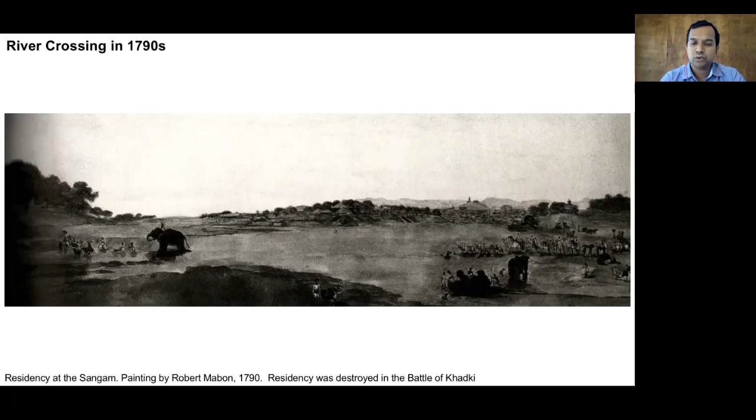During the 17th century, as there was no bridge constructed on the river, people used to cross the river or navigate by walking or with the help of animals. Because the city was very tiny and on one side only, the crossing was also not that frequent.

In the 18th century, this was a painting prepared by a British person. It shows Sinhagad in the background. This is the confluence area where the Mutha and Mula rivers come together, and on the left side you see Parvati and the settlement of Punavadi. You can easily identify that the settlement is very tiny, so the river water must have been very clean here and without any encroachment. The edges are very natural in condition.

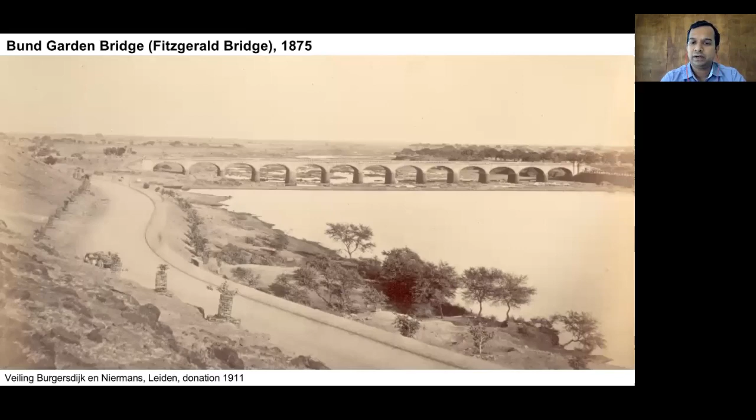After that, the first bridge was constructed at Bund Garden, and some other bridges also came into the picture. So once the bridge becomes a reality, crossing facility is provided and the city starts growing on the other side of the river also. That's how the city started growing on the other bank of the Mutha river.

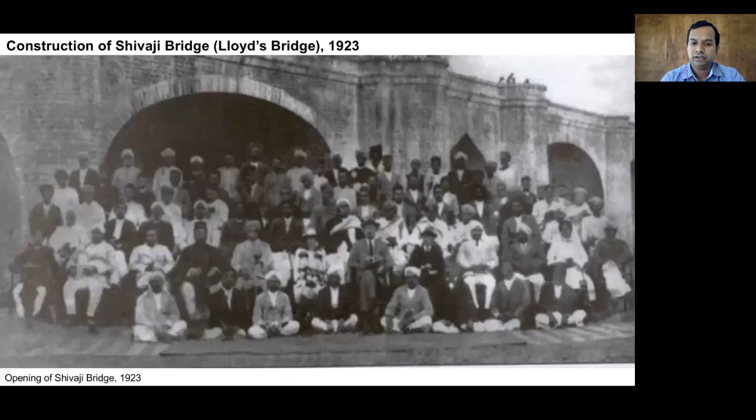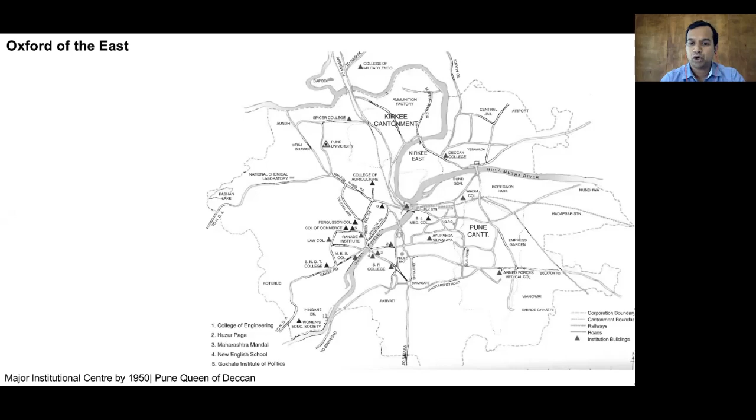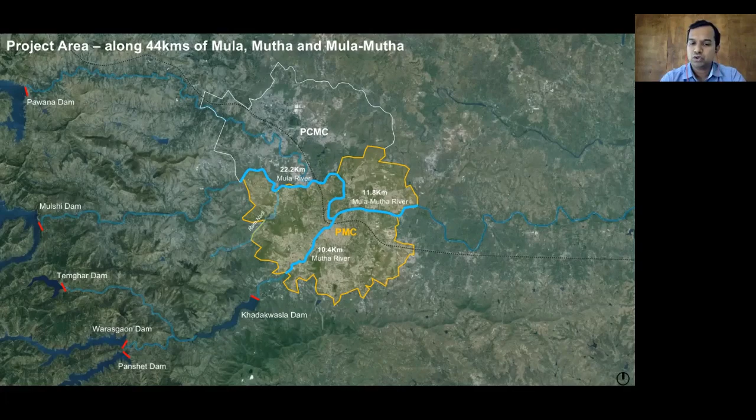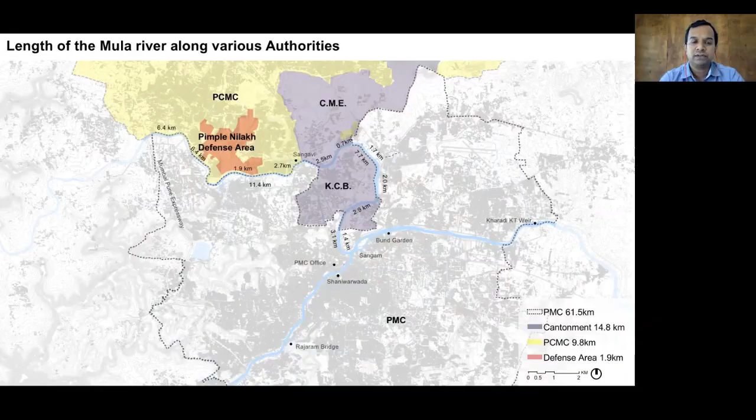We also have the PCMC boundary on the northern side of the Mula river, Pimple Nilakh defense area, CME and KCB defense areas along the river. So all these authorities were part of the project since the beginning, so that they are informed about what kind of proposals need to be framed for the river rejuvenation project.

So now let's understand which are the various technical studies we conducted for this project. There are a number of technical studies we did to understand the character of these rivers. The first one is the topographical survey, geotechnical investigation, hydrology and hydraulics understanding, and we also did a public opinion survey. We did a base map preparation and environmental monitoring also during the whole course of the project. So let's see one by one.

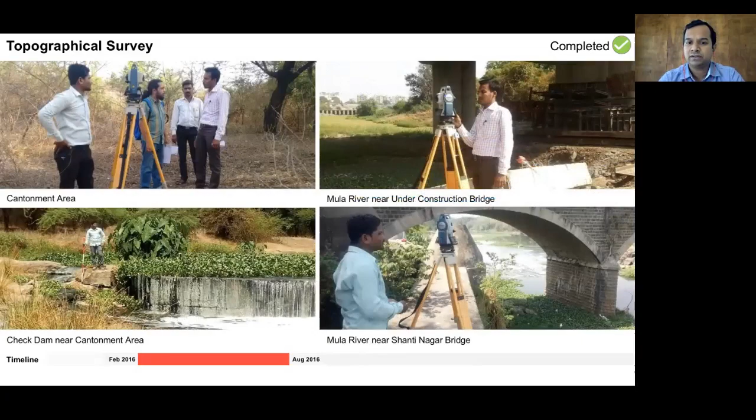And accordingly, we can prepare the further studies. So these are some of the visualizations of how the topographical survey of the entire river was conducted on site, below the bridge, within the river, everywhere.

Third important study was to understand the hydrology and hydraulics part of the river. The entire catchment of the rivers was studied for hydrology, and the hydraulics was also studied. We prepared a hydrology and hydraulics report for the river, on which we got vetting from CWPRS and clearance from the irrigation department subsequently.

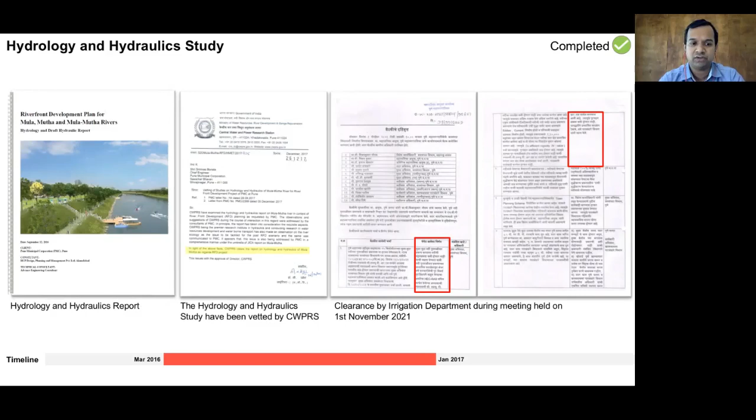In nutshell, whatever quantity of water flows through the river is studied under hydrology. How much water flows is the hydrological study, and how it will flow, what will be the character, what will be the levels, is defined under the hydraulic study. This is the combination of hydrology and hydraulic study, and based on the approved study, the project and the master plan is prepared.

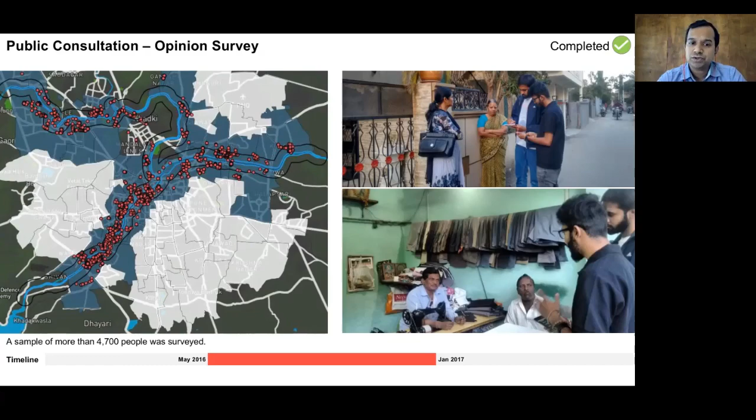A fourth important study was to understand the perception of people living along the river, those who are walking, jogging, doing some work. On both sides, within a 500-meter buffer, that is 1 kilometer total, we did an opinion survey of 4,700 plus people to understand existing issues and their perception and requirements from the project.

Improving the public open spaces - there are very few, and those need to be improved. The aesthetic importance of the river is not there currently; the river is very shabby and unhygienic, so that needs improvement. There are flood threats along the river area in low-lying areas, so flood safety is also important. Connectivity between the banks and along the bank was also identified by the people.

So if you summarize all these points, we need to prepare a comprehensive proposal which will resolve all these issues.

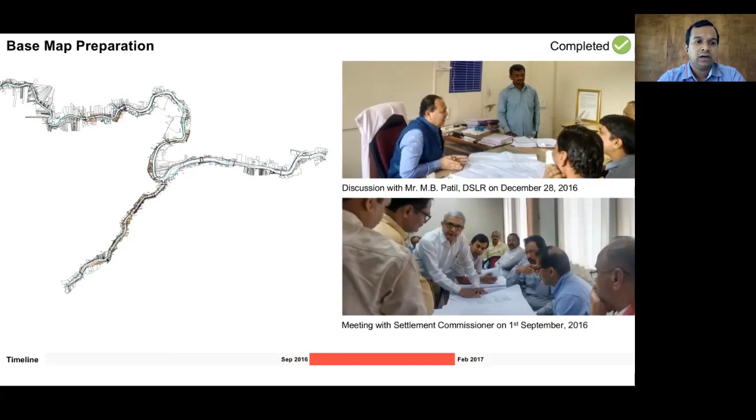Fifth, a very important study we conducted was to prepare a base map. Based on land record data from the land record department for both sides of the river, a detailed land record map was prepared to understand where exactly the river is on paper. Based on the topographical survey, when we adjust the land record data on it, on one side there will be a private plot, then the river, then a private plot on the other side. This black boundary becomes our river land boundary, the legal river land boundary as per the land record.

However, on site, the river might be within these boundaries, or at some places, because of scouring effect or anything, the river might shift a little bit. But in our case, because the riverbed is rocky, there aren't many places where scouring has happened and the river has shifted. So most places, the river is flowing through the river land itself - identifying the legal river land boundary was the objective.

Because whenever we go for execution and want to do some protection work or anything, then we need to understand who owns that land, right?

Sixth, one of the most important aspects of the study was to understand the environmental status of the river, such as the quality of water, soil, air, everything. We did baseline monitoring for all these aspects, and subsequently the project also got environmental clearance in November 2019.

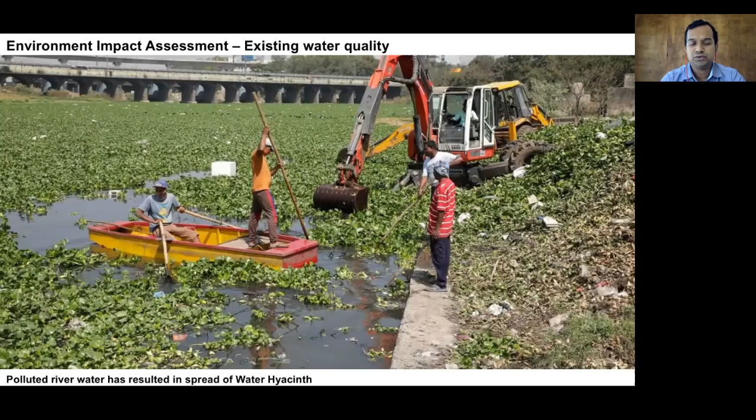So whatever water we see in the river is very much polluted, or it's sewage water flowing into the river. These are some of the locations where you see huge development of hyacinth and pollution. So all these were the technical studies which show that our river is very much polluted.

Our city has grown along the river, and we need to do a comprehensive project to deal with all the issues. But when we go on site, we also see some other visual aspects, like huge dumping of garbage along the river at many places. Similarly, debris dumping is happening along the river, and that's why pollution into the river, which we may call encroachment into the river, is also happening.

There are a number of piped outfalls or nalas, open outfalls, which are bringing polluted water into the river, which is further deteriorating the quality of water in the river.

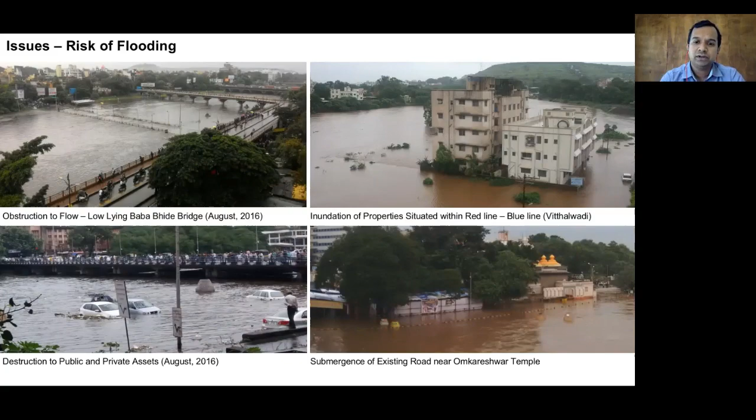Similarly, because the city has grown in numerous directions, we have 88 kilometers of edge here, so surrounding areas are often getting submerged during floods, and even the low-level roads or bridges get submerged very frequently. So flood threat is there.

Majority of the river edge is inaccessible. People cannot see the river, people cannot walk along the river, though it is a public asset. Majority of the river bank is dry, and whatever water we see in the river is just polluted drainage flowing into the river.

Even the Mula river, Mutha river, and Mula Mutha river, all three rivers have similar quality of water and similar dry riverbed. Because of this dryness, there is no growth of ecological trees, grasses, flora, fauna, and the unavailability of water is resulting in loss of aquatic life.

If we look at many places, the authority has developed some nice ghats. Drainage lines are there to control pollution in the river. Temples or gardens are also developed along the river. But all these activities or efforts are in a piecemeal manner.

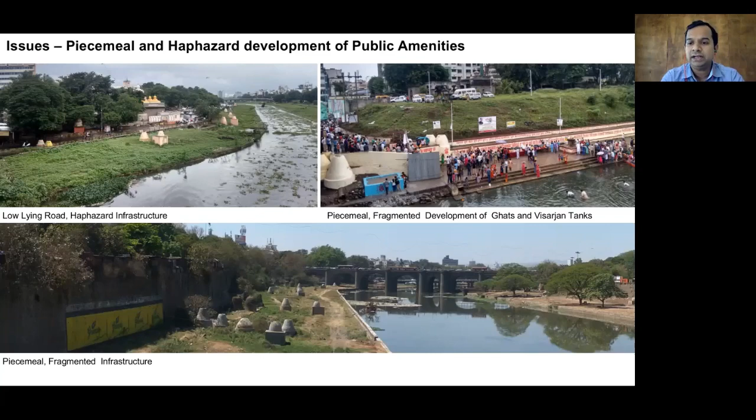So now under this project, we need to create a comprehensive proposal which will connect all these, and yet it should create a meaningful space for the city.

All these observations bring us to the conclusion that the city has turned its back to the river. Nobody wants to see the river. Nobody wants to approach the river. Even along the slum, you see a protection wall constructed so it isn't affected by the flood, and they don't want to see the river. Most people use the river for dumping, as you see here.

So our idea was to identify the issues that are there in the river, and all those issues need to be addressed and converted into a positive opportunity for the river development, river rejuvenation project.

So if the river is polluted, then we need to make it clean and pollution free. The river has a risk of flooding, so that risk needs to be reduced. The river cannot be accessed by people, so we need to make the river accessible in a strategic way. The riverbed is mostly dry, resulting in loss of ecology and biodiversity, so we need to bring in clean flowing water.

Poor connectivity along and across the river is creating issues, so we need to improve the connectivity aspect of the river. Whatever piecemeal, haphazard development has happened, along with existing heritage, recreational, religious, and socio-cultural activities, those need to be integrated into this proposal, and better connectivity with the river should be established.

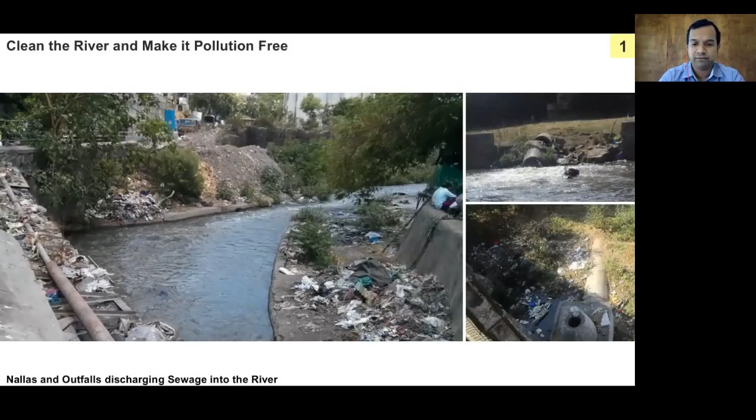Now let's see one by one how these objectives are strategized into the master plan. There are multiple locations where pollution is entering the river in the form of nalas and piped outfalls. These are the locations where the nalas and piped outfalls are bringing pollution into the river.

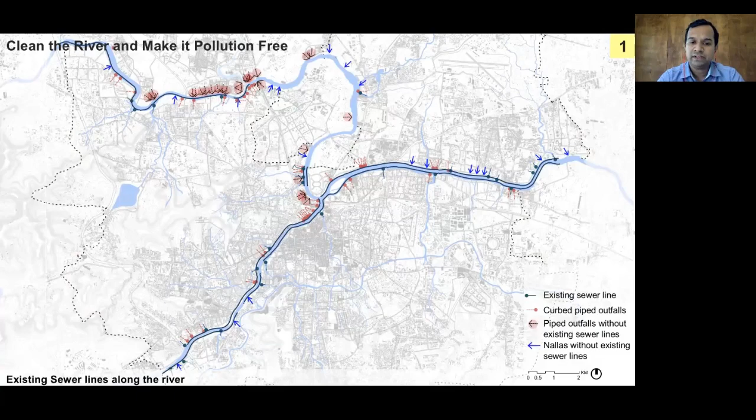So we try to understand where the existing interceptor lines along the river are. Either they can help to curb these piped outfalls and nalas and take the effluent into these interceptor lines. Apart from that, the JICA proposal is also ongoing. Under the JICA proposal, there are some locations where, along the river, the interceptor line is proposed. So wherever possible, these piped outfalls or polluted nalas can be curbed with the help of these lines and taken to the STP for treatment.

However, even if some nalas and piped outfalls remain and enter into the river, polluting it, then we can add another interceptor line which can help us curb these polluting sources and take the effluent till the treatment plant.

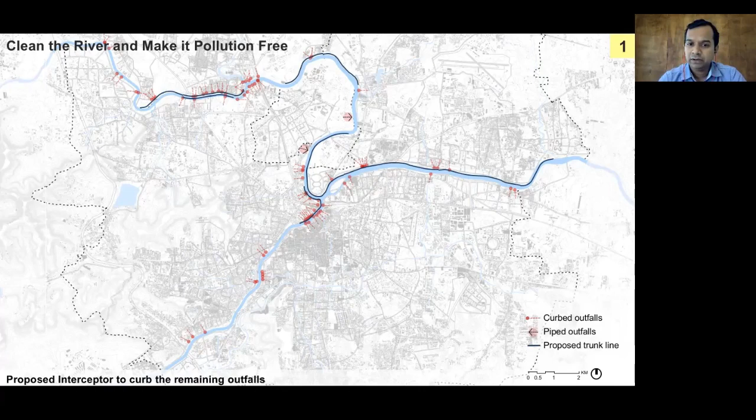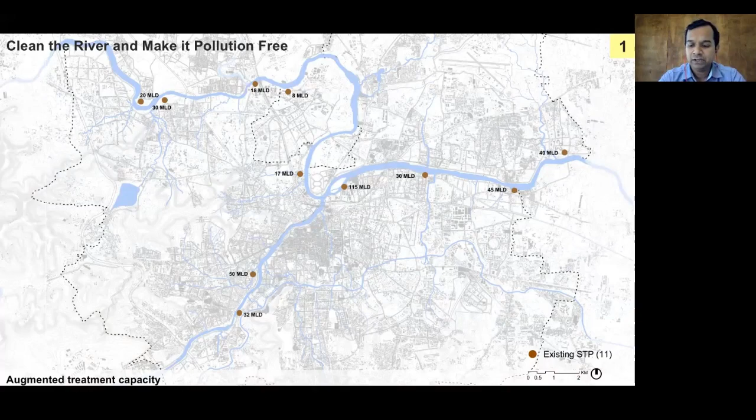So let's understand the scenario of the STPs. Currently we have 11 STPs, and most of these are along the river. Apart from these 11, under the JICA project, 10 more STPs are proposed and will be added very soon. The work is ongoing, tenders have been floated, and very soon we will see these STPs working, taking care of the entire treatment of the city's effluent.

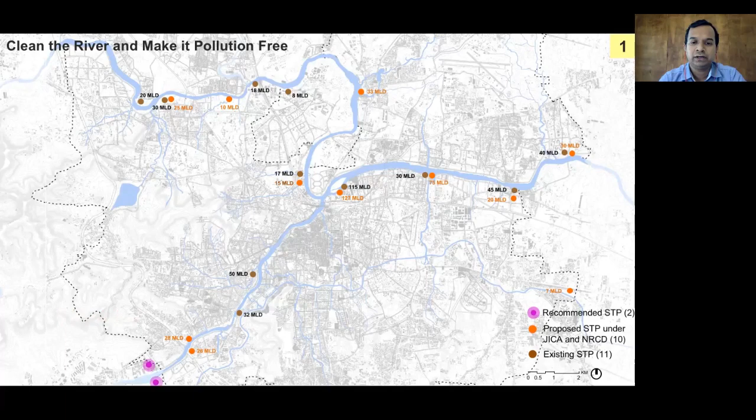Apart from that, on the upstream part of the river Mutha, we can see development happening, so effluent from there should not directly flow into the river either. Hence, we have proposed 2 STPs on the upstream part, on both sides of the river, so that only treated water enters the river. Once these STPs are established and executed, PMC will be able to treat 100% of the effluent generated in the city, and no outfalls will bring effluent into the river.

In the existing situation, we have 477 MLD of working STP capacity. Under JICA, these 10 STPs will add 396 MLD, which together becomes 873 MLD. Apart from that, private STPs already existing add 32 MLD. There are 4 additional STPs in progress totaling 132 MLD, and the remaining 25 MLD STP will also be added, covering 100% of Pune city's requirement.

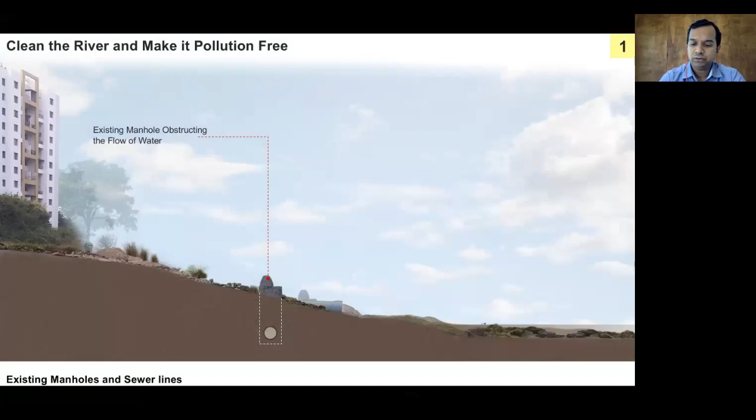But in the existing condition, we also see these kinds of interceptor lines along the river with huge manholes. During floods, these manholes act as an obstruction to the flow of water and also get damaged, resulting in leakage of sewage into the river. To avoid that, we are proposing to integrate these existing lines. If required, we can shift these lines behind and better integrate them with the proposed green embankment, so there will be no damage, no obstruction to flow during floods, and maintenance will also be very easy.

And that's how we can get rid of the garbage dumping and construction debris along the river, and make, in a real sense, the river clean from all types of pollution.

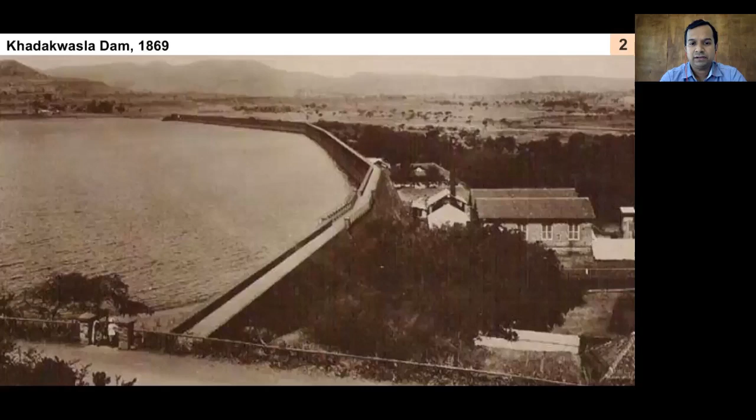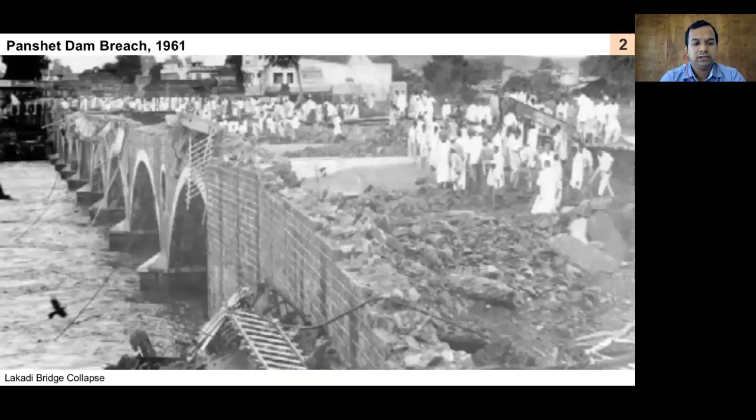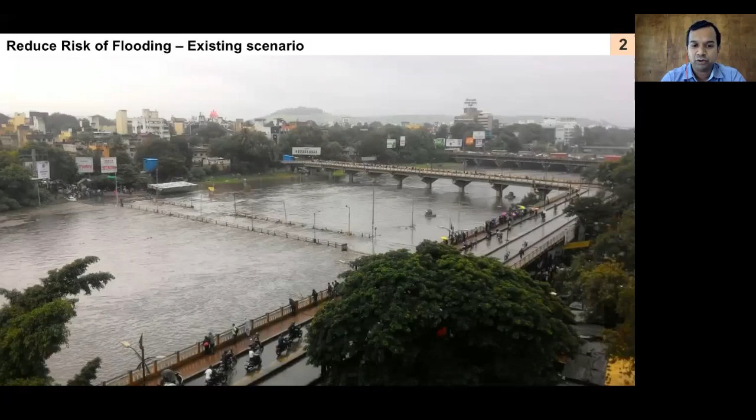However, we still face some amount of flooding along the river, which is a kind of frequent flooding, up to the 100-year level. In this photograph, the Baba Bhide bridge, which is a low-level bridge, and the roads along it on both sides are submerged under water. Because of these kind of structures, the flood water level also increases, as they create obstruction to the water flow.

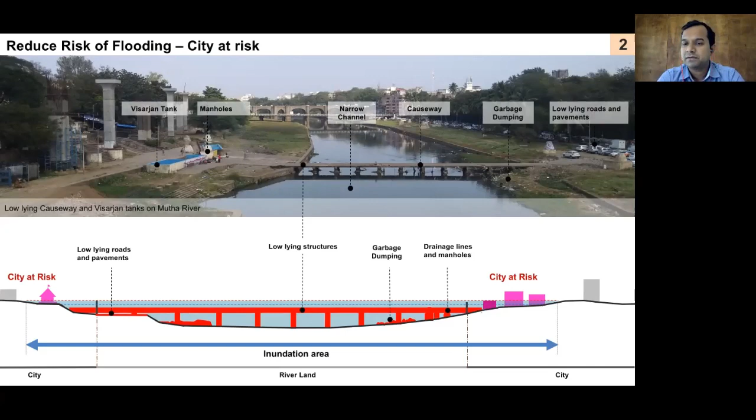So if we remove all these obstructions, the path of the river water will be easier, the water level will reduce, and it will also reduce the inundation area. However, there might still be some inundation into the surrounding area.

In order to protect these surrounding areas, we need to create edge protections. But understanding the local climate and conditions, we are proposing a green kind of edge protection work. During non-flood time, it will house thick vegetation, native grasses and shrubs, and walking trails. And when the flood comes, it will allow the flood to pass, but not inundate the surrounding areas.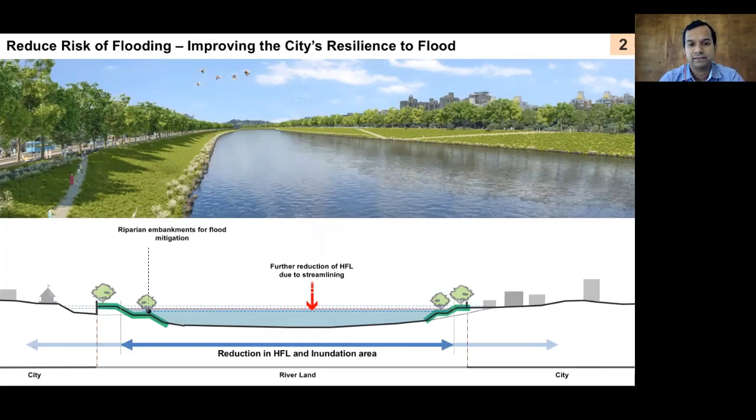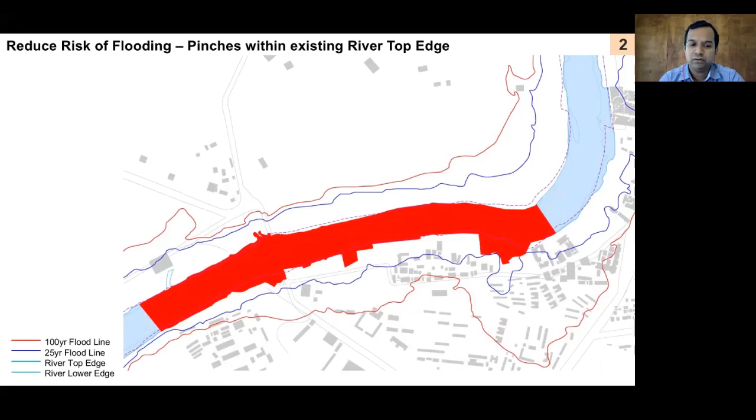When water flows through the river in a lean period, it flows in a meandering manner because the river edges are undulating, both front and back. When the water level rises up to the river bank top, the undulation increases because of these meandering edges, which you can see here.

When the flood comes up to the frequent flood level, which is a 25-year flood, these surrounding low-level areas also get inundated. Because these are very low-level areas, the water becomes a little stagnant there, the velocity reduces, and it also creates eddies, meaning the water flows in a circular manner. This also creates obstruction to the flowing water, and subsequently the water velocity reduces further.

Further to that, when a higher flood comes, let's assume a 100-year flood as indicated in the red line, those low-level areas in the surrounding may also get inundated. Some of these areas might be developed on site. Again, these kind of dead pockets are created where water enters but remains stagnant, not actually adding to the flow area of the river.

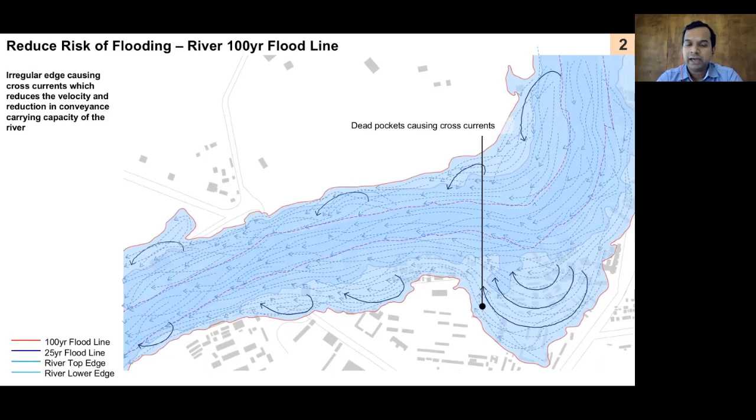So what we are trying to do in this scenario is, the actual flowing water is in the middle where the maximum height and width are available. So from there, if we concentrate all the water to flow, we need to create this kind of streamlining. Our entire water should flow from the center because the surrounding water is not really adding value, rather creating eddies and reducing the velocity and increasing the HFL.

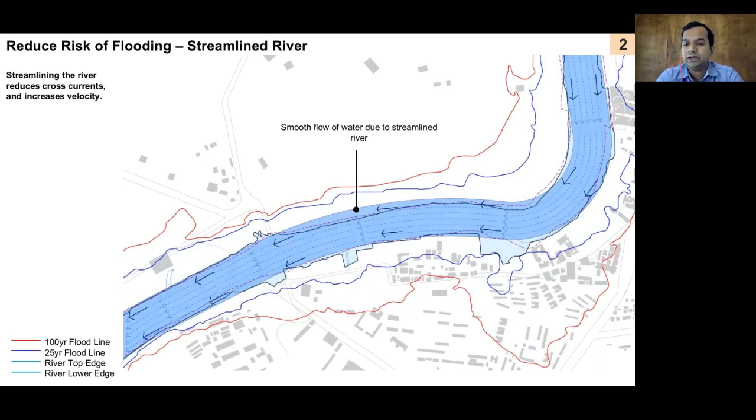So in order to ensure that the water flows through the river itself and does not inundate the surrounding areas, it is important to create some edge along the river. And that edge protection work, which we can call a 100-year embankment, is proposed along the river, along the same alignment as the existing river. So this is how the existing cross section looks like.

The dead areas were there, and by doing the edge protection, we get rid of the dead areas and the river velocity increases. Now let's see a particular location.

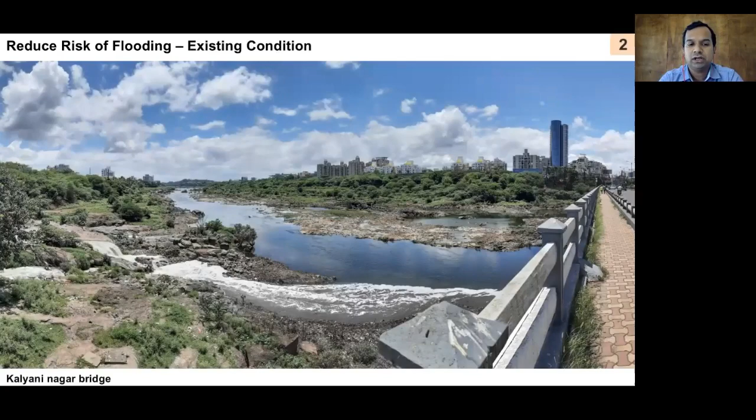This is a photograph from the Kalyani Nagar bridge showing how the lean period effluent water flows into the river. If the surrounding inundation area gets inundated, like if the 100-year flood comes, here's how it happens. But if we have the edge protection work, the same water will pass through the river prism only. It will not inundate the surrounding area.

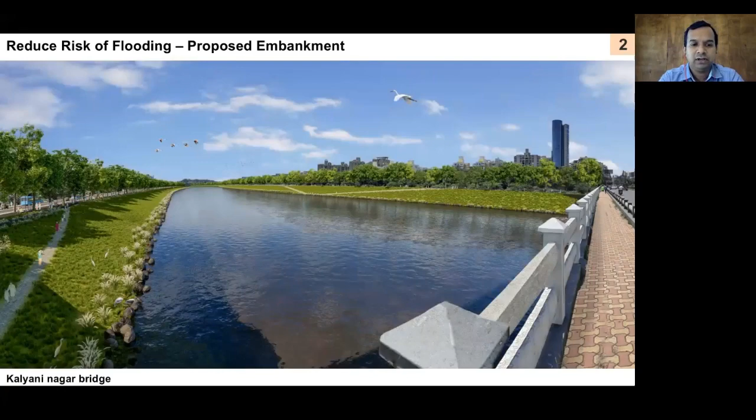And once the water is gone, the next day we can again have these green edges available for people to walk and jog. Similarly, if we have a developed area, in that case if the 100-year flood comes, the damage will be very high. There will be damage to property as well as life.

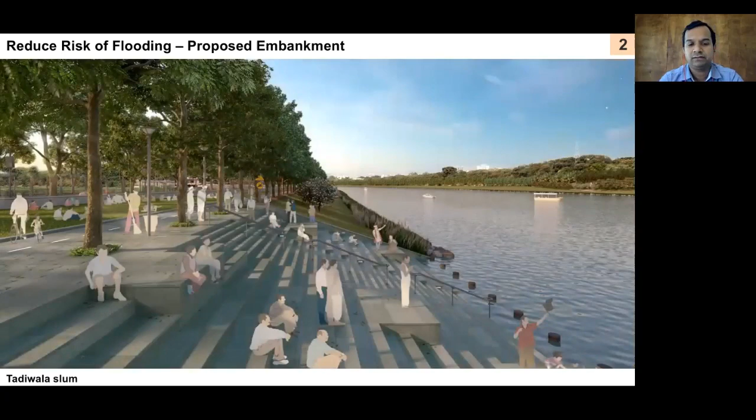In order to protect these areas, we need to have this kind of edge protection work, which will not allow the water to enter these areas, but water should flow through the river only. And once the flood is gone, it is available for people to access easily.

But because our rivers are very long, 44 kilometers, we don't want to have one type of embankment. So we try to understand the various types of development along the river. We observe that there are some areas where sparse development is there, or rather no development at all. Some areas have moderate development along the river, and some areas, especially Mutha Nadi, where development has choked the river.

That means we have areas where significant land is available, areas where moderate land is available, and areas where no land is available. The development or city has reached up to the river itself, and you see the narrow existing channel also there inside the Mutha river.

So our objective was, wherever land is available, we can create these kinds of green edge protection works with walking trails, cycling trails, using natural stones and compacted earth, native trees and grasses.

If the land is a little limited, then we can go a little trapezoidal, however the technology can remain the same natural material. But if there is no area available, then it is forceful to go vertical. However, this vertical edge protection will also have trees so that people can walk through the shade, and the interceptor line will also be accommodated inside to ensure clean water.

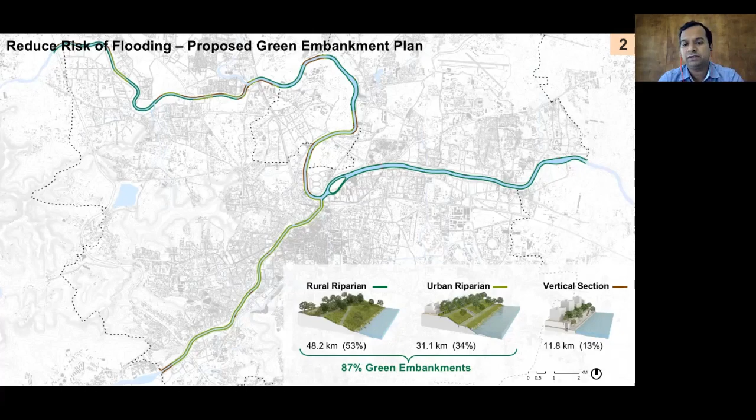So in summary, the majority of the river edge protection work will happen in a natural form, with natural material, covered with native grasses, trees and shrubs. And that's how we will be able to protect the low-lying surrounding areas, as well as protect the river from encroachment and erosion.

Now let's go to the next objective, which is making the river accessible for people, because the river is a public asset, but we cannot approach the river, we cannot see the river, we cannot really enjoy the river everywhere. At very few locations can we see the river. But we don't want to make the entire river, 88 kilometers of edge on both sides, accessible.

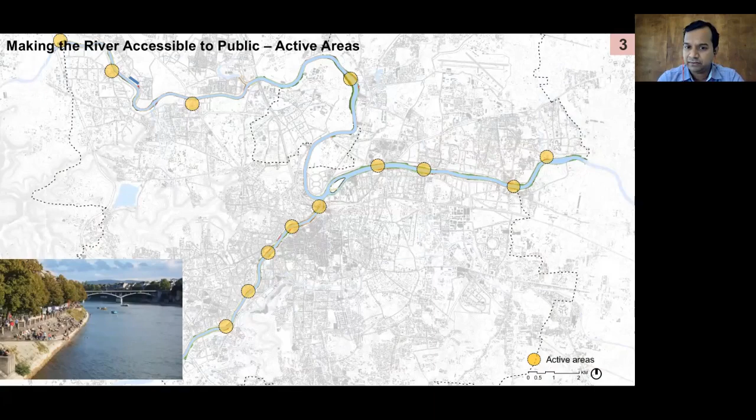So we prepare a strategy which says wherever we have existing activities, there we can propose the active areas where there will be more footfall. Majority of the river may have calm walking areas or walking trails only, where people can do walking, cycling, sitting, and more greener sort of edge protection work.

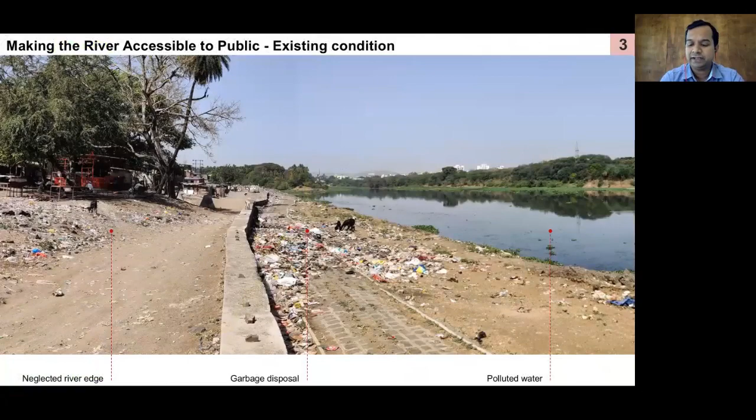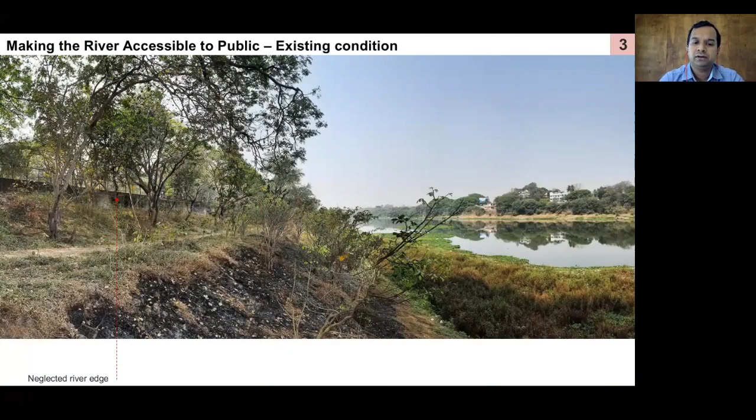However, at some places where we have a place like Salim Ali Bird Sanctuary, or the Ram Nadi confluence, there we can definitely go further with a more greener and natural way, ensuring a minimalistic approach and minimalistic access at these areas, so that we should not hamper the existing ecology.

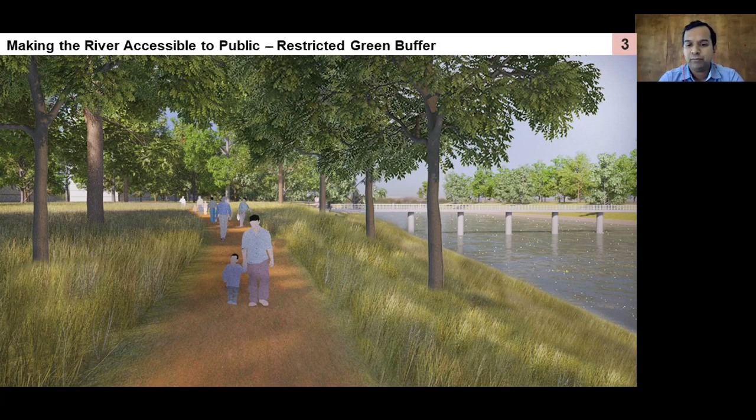So all these three types of embankments will have upper level, lower level walkways, staircases, and plantation.

Apart from that, we also have the culture of Ganesh Visarjan, and for that, at numerous places, we have small or large ghats developed. Some of these ghats are in very good condition, while some need repair. So we mapped all these ghats which are there on site, and at strategic locations, we also added some more ghats.

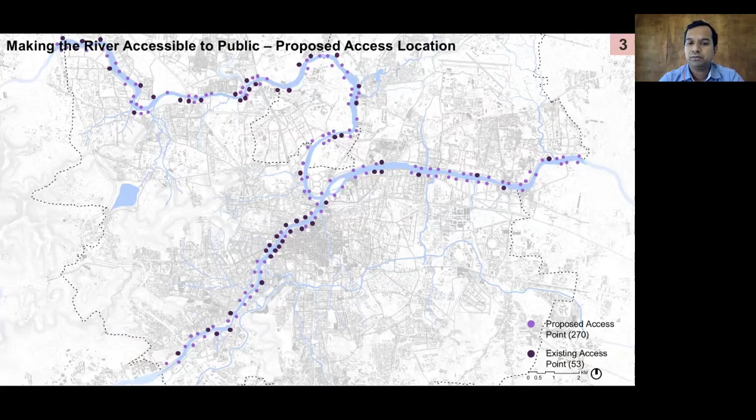At many places, we have these access steps. More access steps will be added along the river, so that at many places people can reach up to the river or see the river. These might be in the form of steps or a ramp.

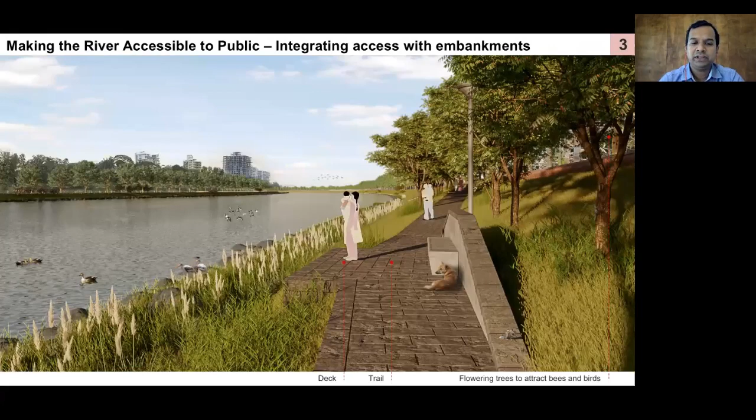This is one of the visualizations which shows that at the upper level we have a wide walkway, and there might be some trails taking people down to the water. If you see this existing condition and how it might be transformed, one can enjoy the ecology and the clean water along the river. That's how strategically we can improve the accessibility along the river.

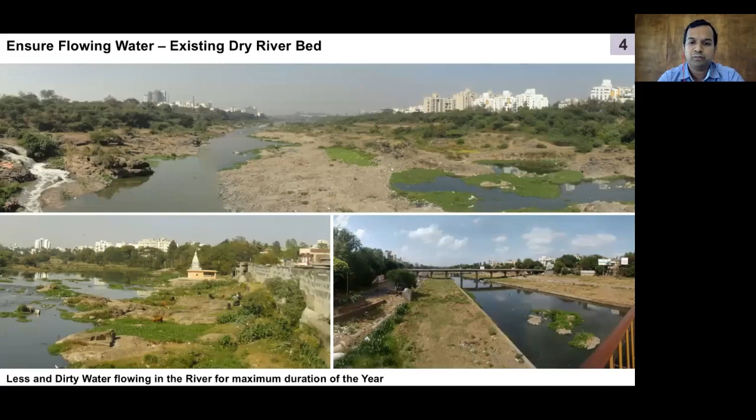Now, let's understand how to ensure water in the river, but that water has to be clean as well as flowing. In the existing condition, the majority of the river bed is dry, and whatever water we see is polluted water only. Why is this happening?

Because if we see the existing reservoirs, they are very small reservoirs, and because of that, the water retention is only up to a certain level and length. Apart from that, these reservoirs are either solid in nature or have a very large number of small gates, which is actually resulting in a solid barrier for the flow of water. That is resulting in siltation on the upstream part, as well as afflux during the flood.

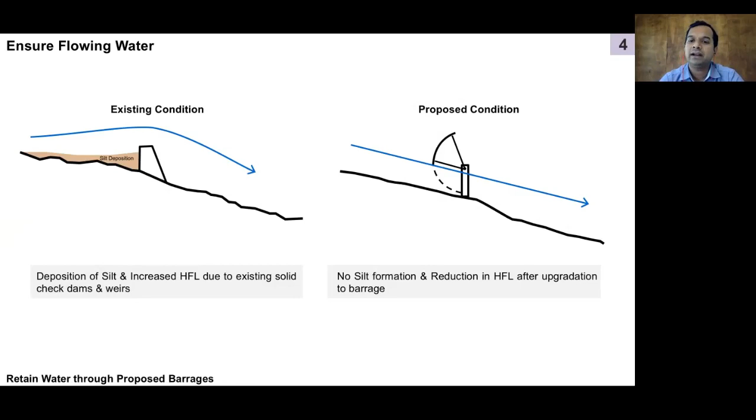So we are proposing to remove these solid retention structures and replace them with advanced barrages, which will open from the bottom during flood time, so that there will be no siltation at the bottom, and the HFL also will not increase. After the flood time, we can again close the gates and retain the water into the river for the entire length of the river.

So this is the existing scenario, where you see that at a few places we have water, and the majority of the river is without retention. However, considering the existing water retention structure locations, the advanced barrages are proposed so that the entire river will have water availability.

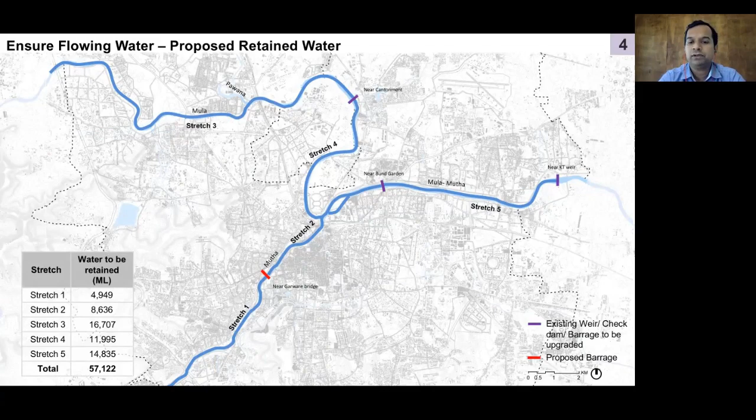After having the water availability, around 57,000 million liters of water will be stored into the river. As our river has a rocky bed, a limited amount of seepage will happen, and we also calculated the evaporation rate. In totality, around 56 MLD of water loss will occur per day, considering evaporation and seepage, reducing the retained water by that amount daily.

However, around 873 MLD of water will be treated in existing and proposed STPs, which will be poured into the river to ensure flowing water. That's how clean and flowing water will be made available. We need only 6% of water to balance the retention, and the additional 94% will ensure the water keeps flowing, so it will never be stagnant.

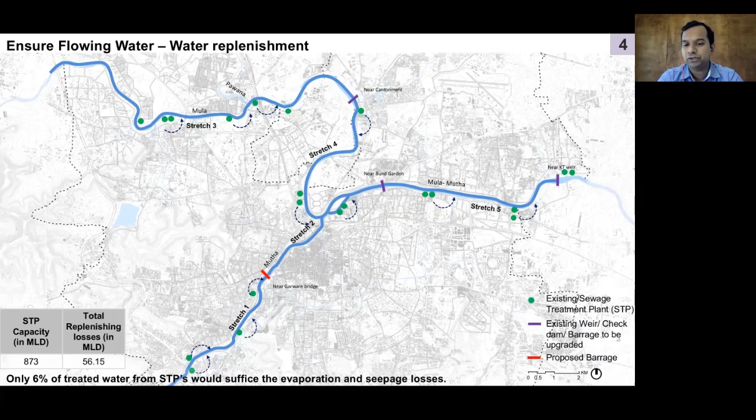To ensure water quality as per MPCB standards, if required, tertiary treatment facilities will also be installed so the water in the river meets the standards. That's the commitment by PMC, so that water poured from the STPs will be of that quality.

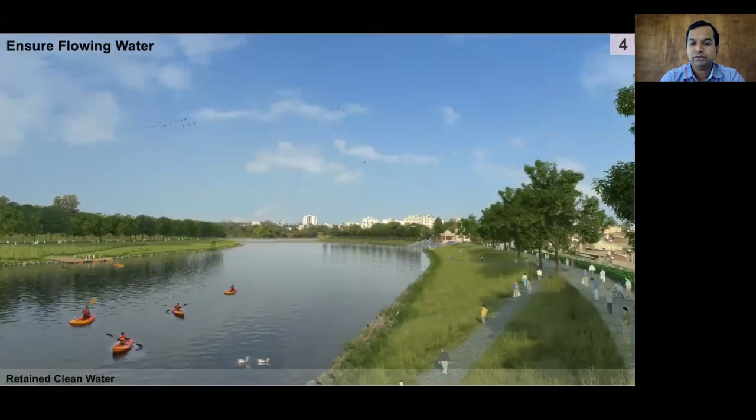So let's see how the current river is. After clean water is retained at strategic locations, recreational boating can also happen. Because the river is narrow, meandering, and has a rocky bed, we are not proposing complete navigation through the river, but on the upstream part of each reservoir, recreational boating will definitely be possible.

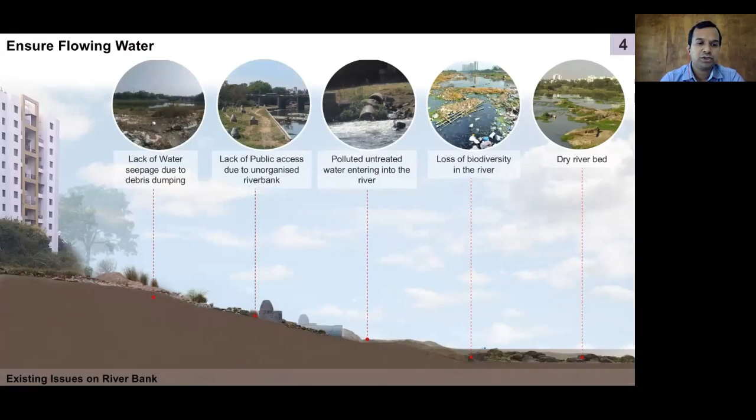Let's understand this in a cross section. This is the existing condition of the river, where the riverbed is mostly dry, causing a loss of biodiversity. Whatever water is flowing is mostly polluted. The drainage lines are very unorganized and haphazard, with dumping of garbage and debris causing lack of seepage, and pollution entering the ground, leading to random invasive species developing along the river.

What we propose is, with clean water in the river and the help of boulders and deep-rooted grasses, aquatic and surface life will flourish. We propose indigenous grass species to protect the edge and prevent loss of surface soil. Hardy indigenous trees are proposed for nesting and roosting, and fruit trees for birds, bringing back the lost ecology.

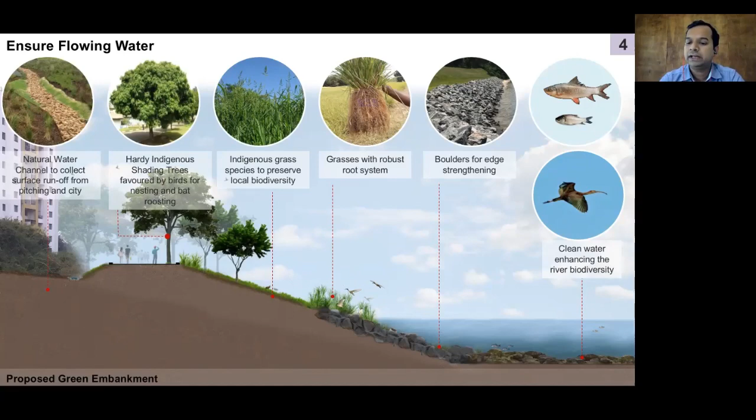People will be able to walk along the river under the shade of trees, with green edges. Earthen embankments are proposed, with retained water in front. Natural materials are used, and landscaped edges are proposed.

By ensuring clean flowing water into the river, it will help recharge the ground through the seepage effect. The current riverbed is dry with exposed rocks, causing temperature to increase during summer, and edges are barren without trees in many places. With water in the river and thick vegetated edges, the local temperature will definitely reduce.

We are also proposing to restore the existing flora and fauna, as mentioned in the accessibility strategy. With water in the river, the ecology and biodiversity will improve. At strategic locations, recreational boating will also be possible, and in totality, the river will get rejuvenated, coming back to its self-cleaning capacity.

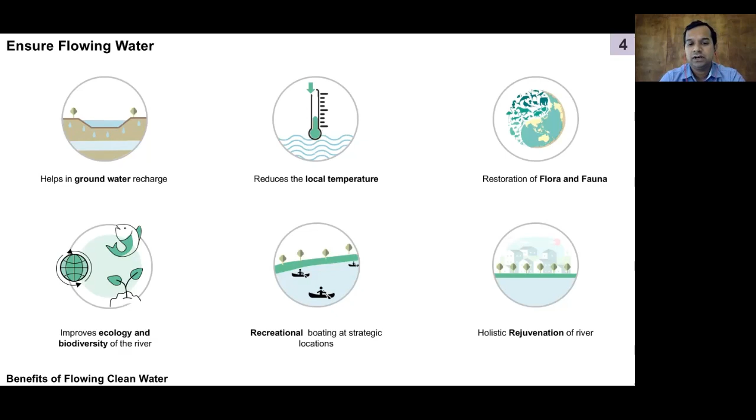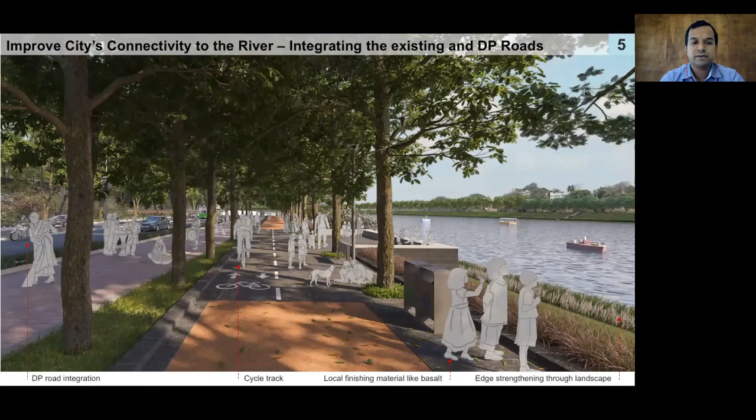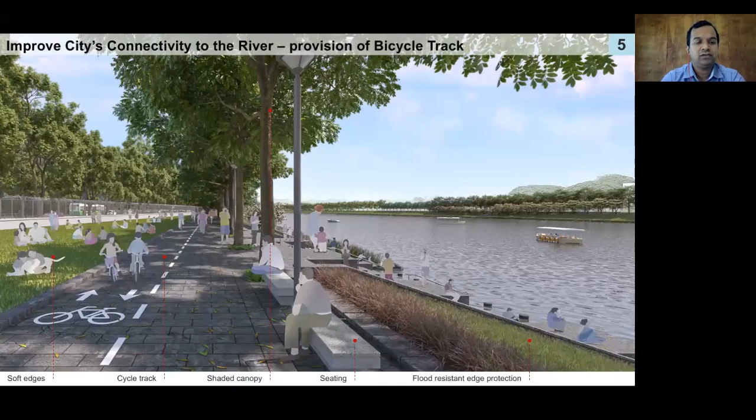Apart from that, the upper level promenade will not only have pedestrian movement, but also help to have smooth cycling trails along the river. And that's how the city will improve its connectivity with the riverfront project.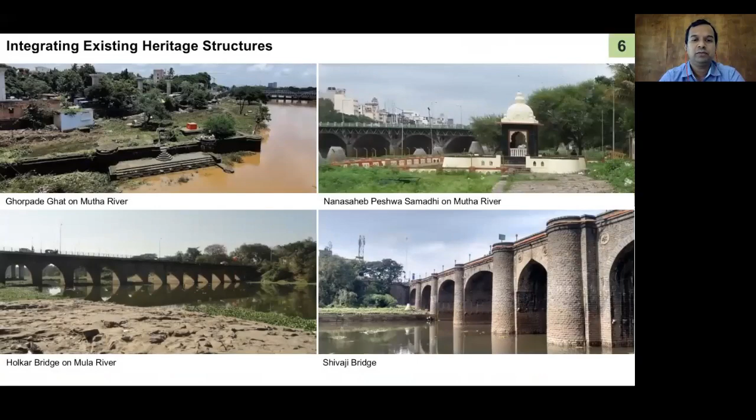Lastly, because Pune city has very long heritage and cultural significance, a number of places have heritage structures along the river. These heritage structures will be very sensitively integrated with the green embankment designs, addressed at the detailed design stage. For example, the heritage wall on the right side, the Shivaji Maharaj bridge in stone behind, and Ghorpade Ghat is also there.

In the visualization, all these elements are not only retained but also enhanced with sensitive design. There is an addition of landscape, thick vegetation of trees, and native grasses for various activities, providing public space and introducing us to our heritage in a better manner.

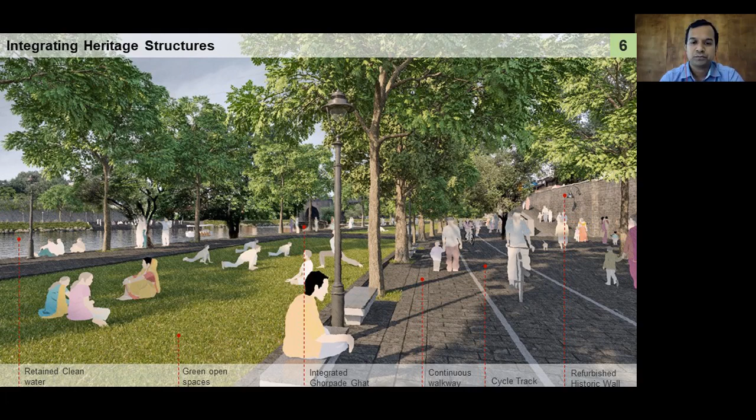This is the photograph from the Dengle Bridge, where this narrow channel will get widened, and you can see how the landscape will appear here. Both heritage walls on both sides are retained, and minimalistic edge protection work is done at a lower level. Similarly, we have these solid Ganesh Visarjan ghats, which act as obstructions during the flood, and at very few locations we have them.

So we are proposing some more ghats at strategic locations. This is Dynaneshwar Ghat, a stone ghat, which will be better integrated. Visarjan could also be added into it, but the polluted water will not enter into the river.

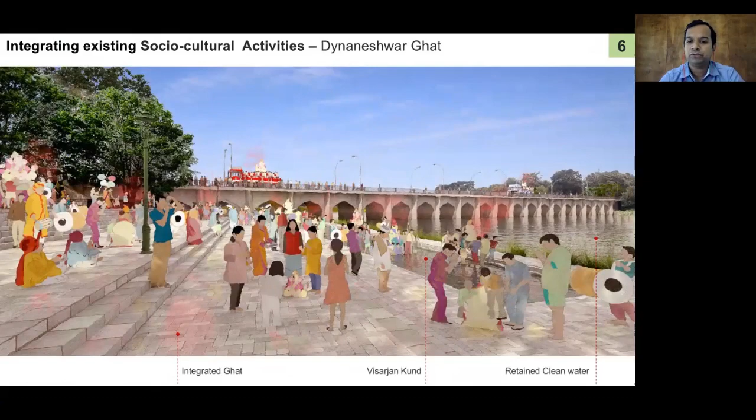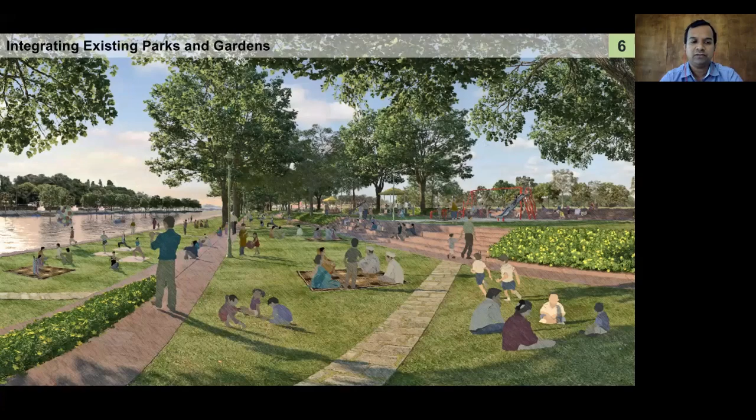At many places, we have existing parks and gardens along the river, which we mapped, and there is a strategy to seamlessly integrate these public spaces with the river, so that the beauty of the park and the beauty of the river complement each other.

And this is how we are trying to achieve all these six objectives, which is the real need of the city and the river. So in totality, what is happening? Let's see it as a master plan.

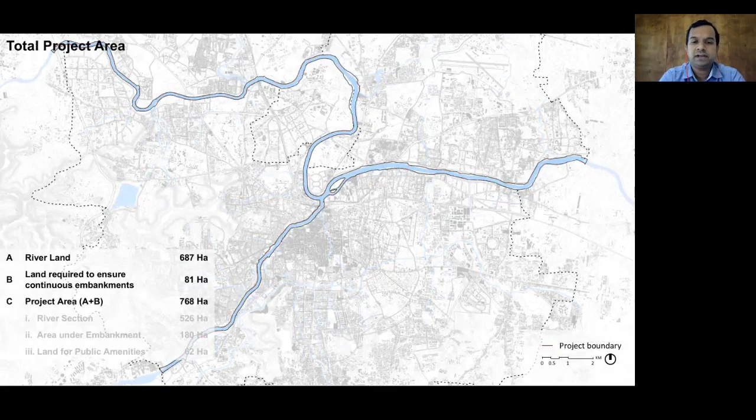This is my river land boundary. As mentioned from the beginning, the river land as a legal boundary is 687 hectares. In order to ensure the water flow as per the 100-year flood and to protect that flow, a green embankment is proposed, and land for that is identified as 81 hectares, which needs to be added into the riverfront project. That brings us to 768 hectares, which is the entire project boundary.

Out of that, 526 hectares of area is reserved for the water itself, where we will have water available in a lean period. In order to have these green embankments along the river, 180 hectares of land will be required, and during the flood, this 180 hectares of land will also be available for the water to flow.

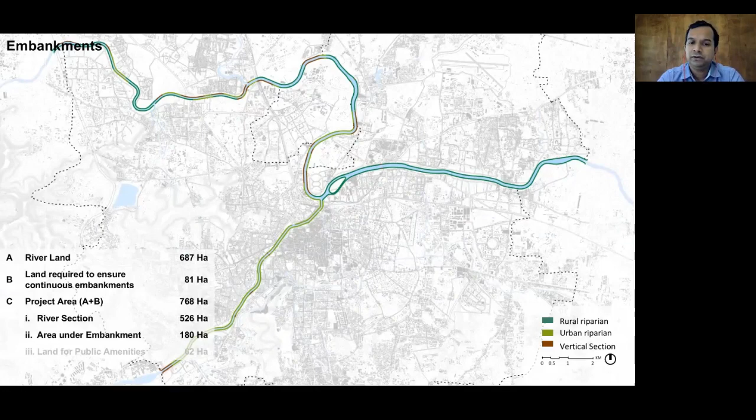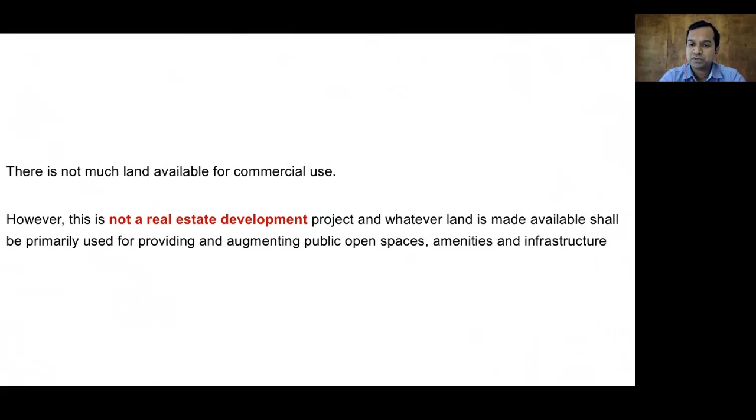That means in totality, around 92% of the area of the project is given back to the river for the water to flow. The remaining 8%, around 62 hectares of the area, which you see as slivers of land, is identified as remaining land for public amenities. But we are not doing any real estate type of development into the remaining land. This entire remaining land will be used only for the augmentation of public open spaces, amenities, and infrastructure for the city, so there is no real estate exploitation.

So this is what the residents of Pune city will get: integration with the gardens, ghats, Visarjan Kund, boating activity, green plazas, cycle tracks, promenades, the eateries above the flood protection areas, and green embankments. So all that will be possible apart from the embankments. This kind of master plan was approved by the standing committee and general body in 2018.

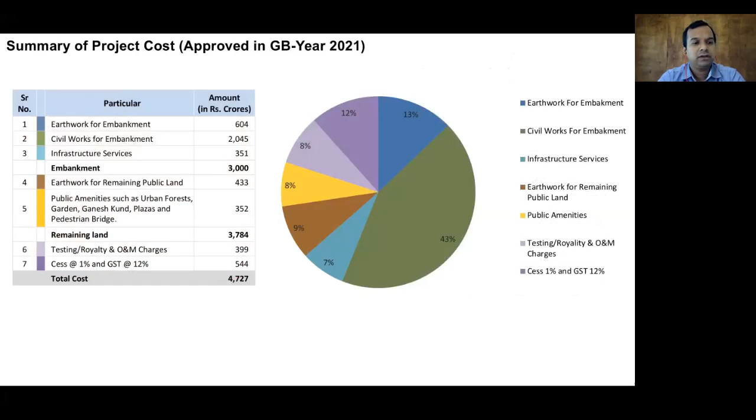The cost of the project was also approved and further updated as per the new rates in 2021. And this is the bifurcation. That's why this project is very much comprehensive and context specific.

Therefore, we call this project a river rejuvenation project. I will repeat again, this is not just a beautification project, because some people say that it is just a beautification project, but that's not the reality. As you saw, it is a comprehensive project. It talks about various objectives, what we see as the current issues of the river, and all these objectives are addressed parallelly. And the design of the master plan is also very much context specific.

There are some frequently asked questions, which I will very quickly cover here. Some people say that there is concretization under this project. No, because 87% of the river edge will have green embankment, only where the land is not available or development has happened along the river will we go vertical. Therefore, it will be wrong to say that there is concretization under this project.

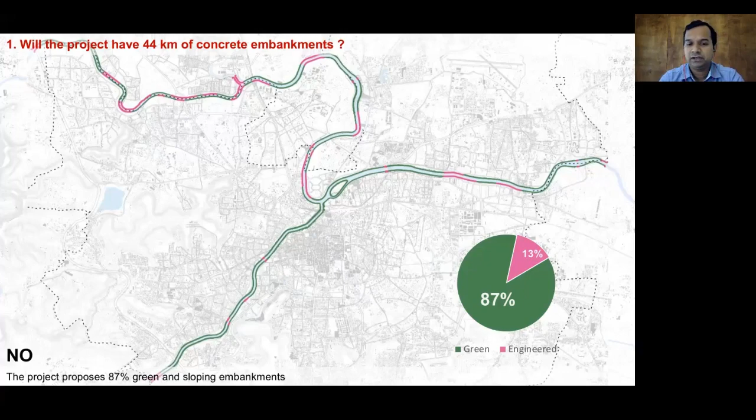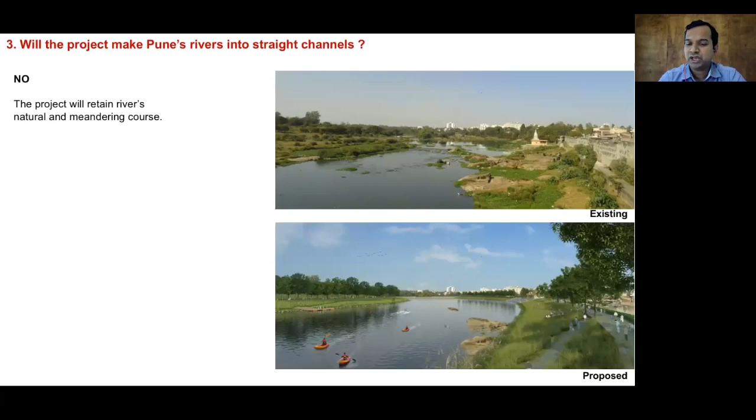Will the project make Pune's river into a straight channel? No, it will not, because the river will flow from where it is flowing. So all the twists and turns and meanders are considered while planning the project. The river will not become a straight channel; it will have all the curves and meanders.

Will the project cause formation of stagnant water pools within the river? No, as I mentioned earlier, currently there is no water in the river, and because of that, there is a loss of ecology and biodiversity. However, we are ensuring water in the river, and that is also clean and flowing water, because more than the requirement of seepage and evaporation loss, additional water will be poured from the STPs, and that's why it will ensure the flowing nature of it.

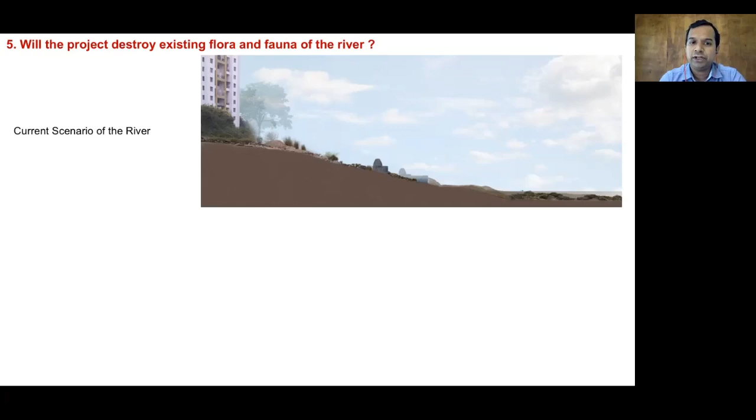Will the project destroy existing flora and fauna of the river? No, definitely not, because in the majority of the river banks, this flora fauna is not available. Only at strategic locations, very few locations, do we have flora fauna. So at majority locations we don't have that, which will be added with the help of this project using native and indigenous trees, grasses and shrubs over natural material. However, wherever the existing natural flora fauna is there, those areas will be dealt with specially, sensitively during the detailed design, and it will be protected and enhanced.

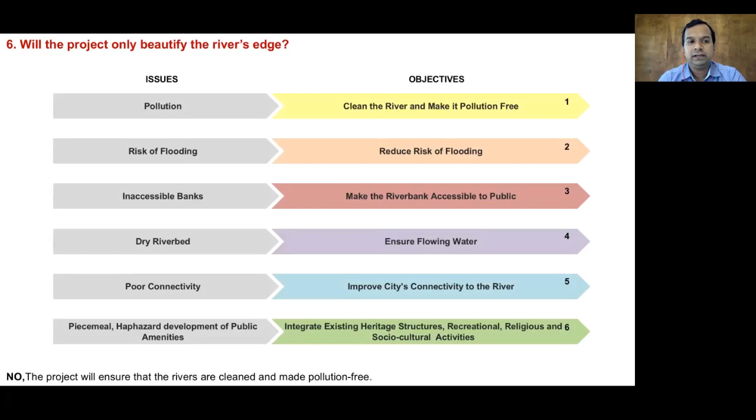Will the project only beautify the river's edges? I repeat again, this project is very much comprehensive. After understanding the existing issues and doing technical studies, all the existing issues were summarized, sequenced, and the objectives are framed so that comprehensively the river gets improved, the river's cleaning and self-cleaning capacity gets improved, and people should be benefited on all the fronts for which they had asked in their opinion survey. So definitely this is not only a beautification project, it is a comprehensive project.

Will the river land be used for commercial development? No, it will not be used for commercial development. The entire project area will only be used for public amenities and recreational open facilities, parks, gardens, and urban forest. So thank you very much.